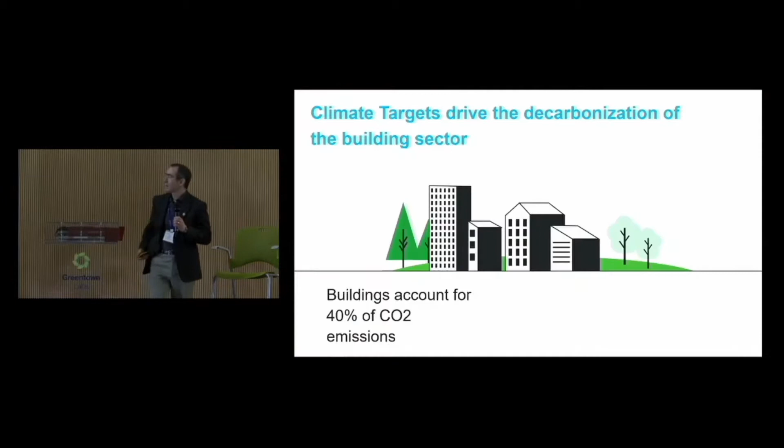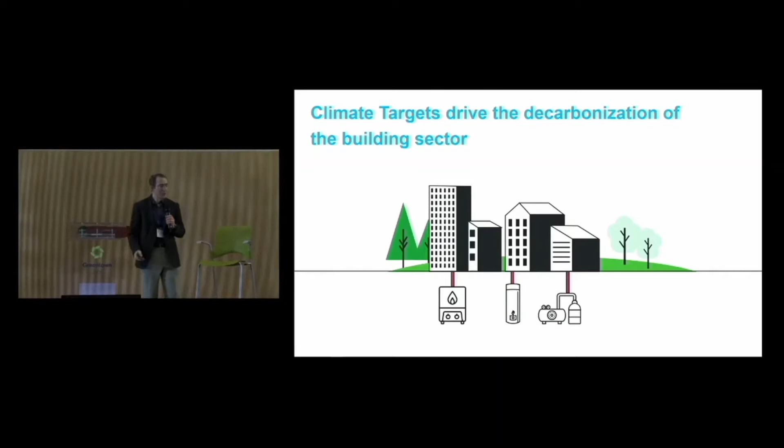Heating systems are common in pretty much every building. They exist in every building. Not only that, they are similar in nature, and they're responsible for one-third of all the emissions created by the sector. And there's another piece of good news here: heating systems are naturally being replaced every 15 to 20 years, creating a massive market of 8 million heating system replacements per year.

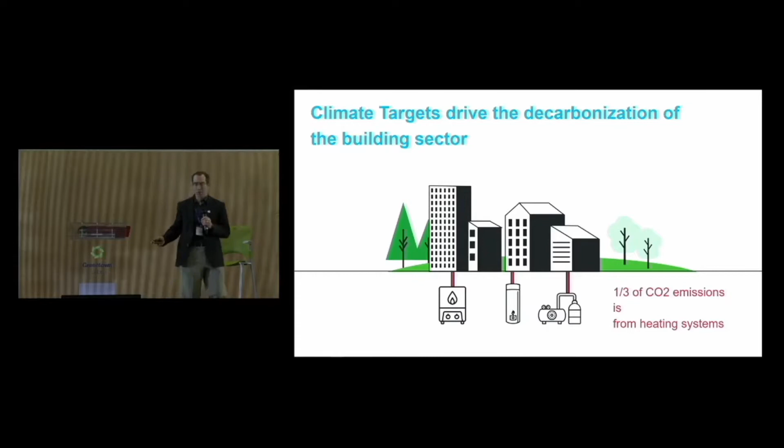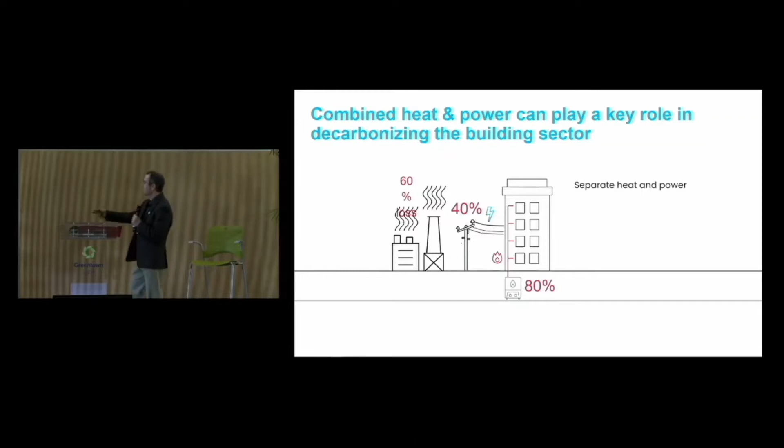So a great way to decarbonize buildings is by replacing heating systems with combined heat and power. If we do it right, it's a very compelling idea to replace aging, inefficient heating systems with a combined heat and power solution. Why? We can move from a building using separate heat and power very inefficiently, with all the CO2 associated with that, into a building using combined heat and power very efficiently. Just by replacing a heating system, we can reduce carbon footprint in every building by 20 to 30%.

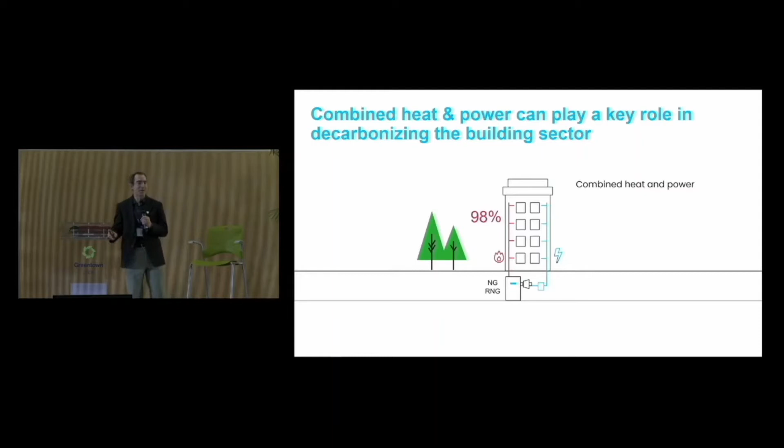And then we can change this building further, eliminating CO2 altogether, because we will use hydrogen and create CO2-free heating and power to millions of buildings.

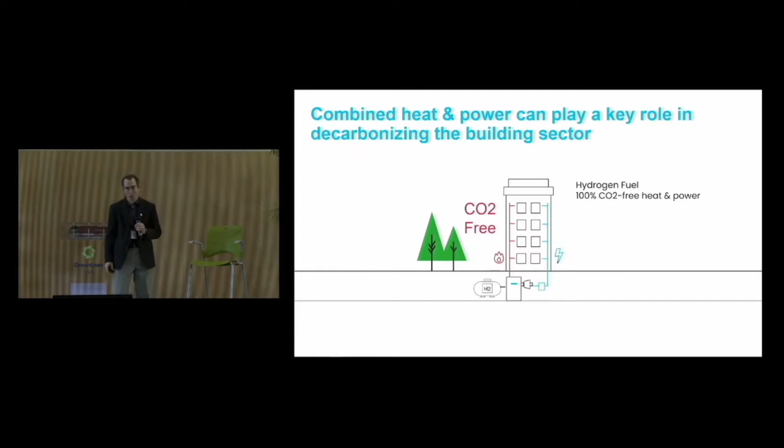But have you noticed, I used a condition: if we do it right. The problem is, we're not doing it right today. The combined heat and power industry is doing it wrong.

In the next 10 years, there will be 80 million heating systems that will be naturally replaced. Heating systems are simple machines, highly reliable, and very affordable.

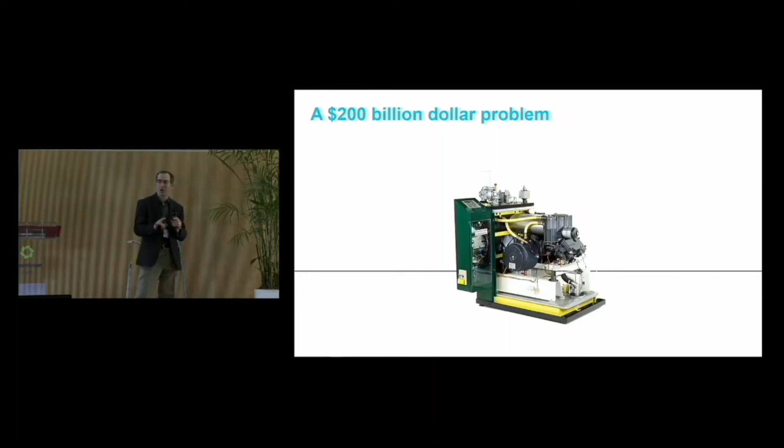But yet, this is what the combined heat and power industry means today: internal combustion engines, missing the $200 billion annual heating system replacement market and the opportunity to quickly decarbonize millions of buildings.

Our mission at Enviro Power is to transform the combined heat and power industry with our SmartWatt boiler. Our SmartWatt boiler, as I said, is a boiler that generates electricity. It's a drop-in replacement to regular heating systems, competing with heating systems on price, installation, and maintenance costs, and therefore suitable to replace all those 60 million heating systems and generate tons of savings in CO2.

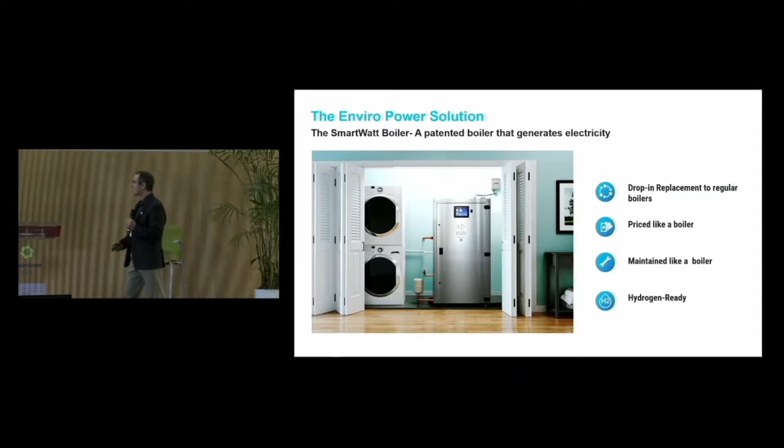The SmartWatt boiler is a boiler with a power plant inside. We seamlessly integrated into the boiler geometry the most common power plant in the world. This is basically a closed-loop steam cycle. And because of the nature of the geometry, we can take hydrogen very simply and generate CO2-free power for millions of buildings.

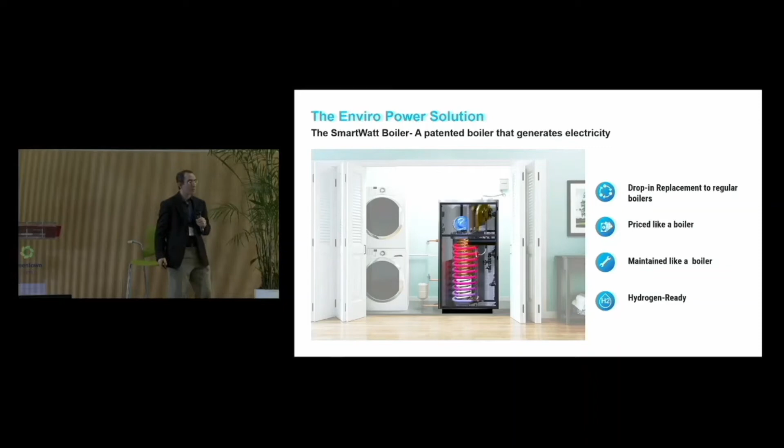How do we leverage that in our go-to-market plan? Two words: scalability and affordability. The system is a match to any boiler production line in the world. We align with boiler producers that produce our SmartWatt boiler and provide the warranty package.

We already can take orders between 2,000 to 4,000 systems per year. Because we compete on heating systems on price, installation, and maintenance, we are an attractive solution to any entity in the business of installing, promoting, and selling boilers.

And we already have POs, purchase orders, in the millions of dollars with leading entities, including leading power and electric utilities and multi-billion-dollar companies here and in Europe.

We start serial production this year, and we plan, in order to support our sales growth, to raise $15 million on Series B. We have so much more to share, and we look forward to our conversations. Thank you.